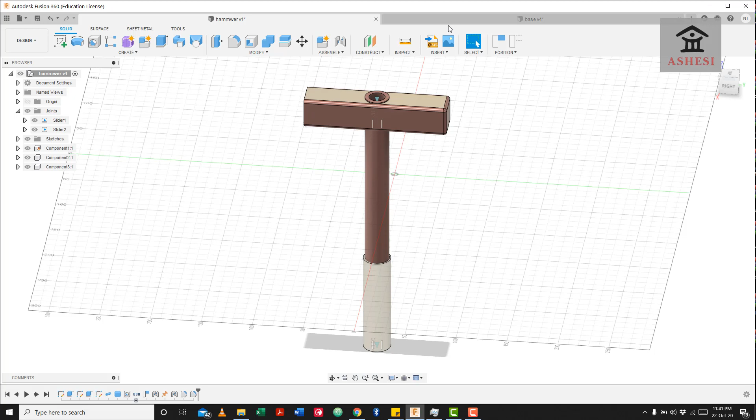In Fusion 360, the tool that helps us assemble the various components is called joints. We'll use joints to assemble this hammer with a sliding plastic handle, to look at the basic types of joints, and then shift to this gearbox, where we will analyze the motion between the various types of gears on this panel.

We will also learn about the various types of motions we can establish between the joints we create, how we can limit the joint motion of some of the gears in this assembly, and how to link the motion of, for example, this spur gear with this spur gear, so that when I rotate one, the other can move as well.

A quick way we can apply this gearbox is in building a windmill. Let's say we want the wind to rotate this big gear through a very short distance, and we want to multiply the distance through which this gear moves by 4. We can have this system of gears that multiplies the distance through which the smaller motor moves by 4, using this arrangement of gears in a ratio of 1:2:4.

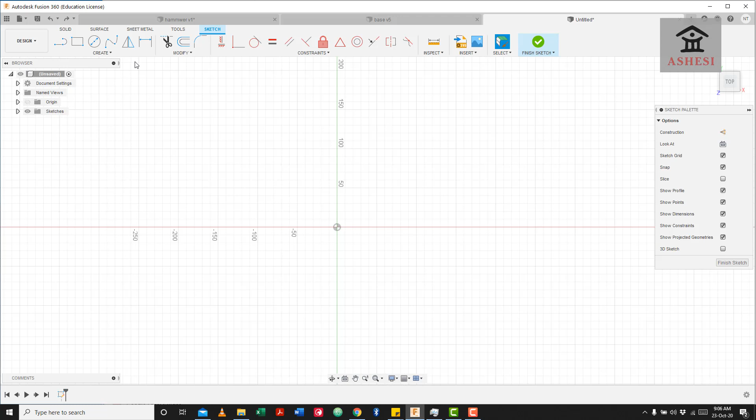To create the hammer, I'll create a new tab and start with a 2-point rectangle of dimensions 120 by 30, then use the dimensioning tools to modify the dimension to 120 by 30 millimeters.

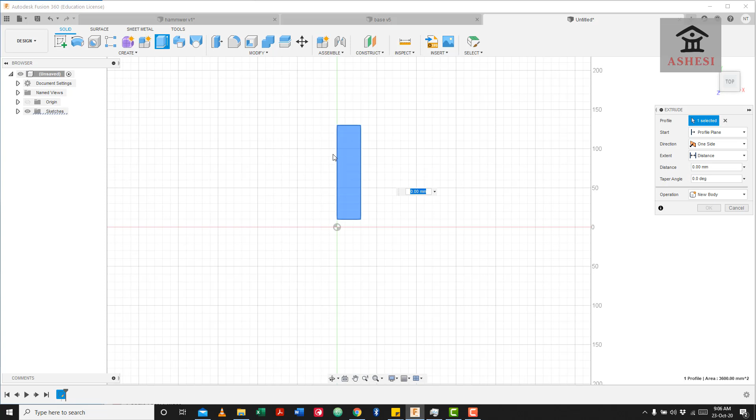I will then extrude this to a height of 30 millimeters, followed by using construction lines to locate the middle of this rectangle by drawing 2 diagonals.

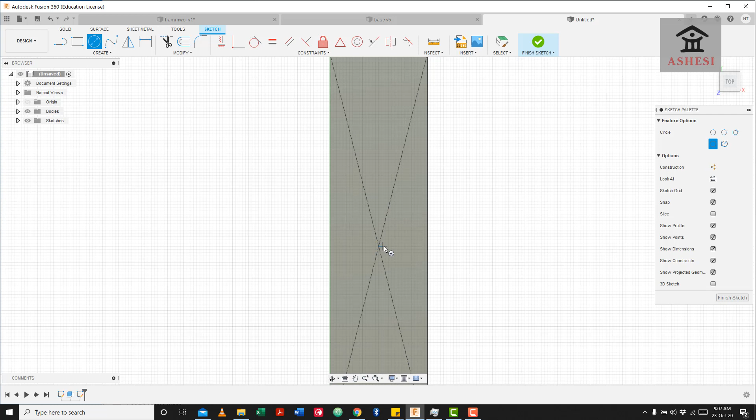I will then draw a center point circle at the middle of the diagonal with a dimension of 24 millimeters.

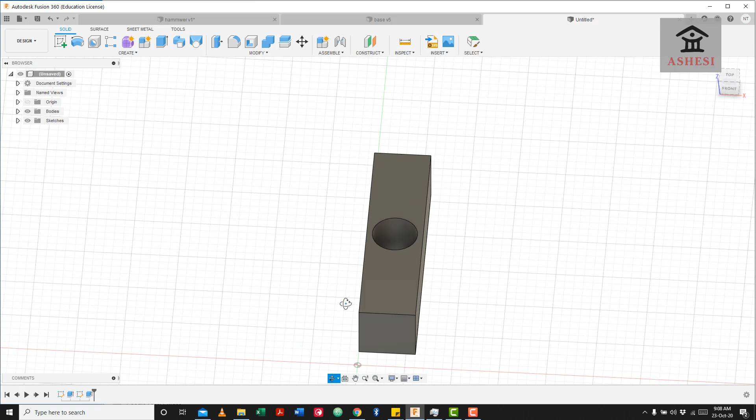I will then extrude cut this rectangular prism by cutting through the circle through a distance of minus 30 millimeters. This will result in something like this.

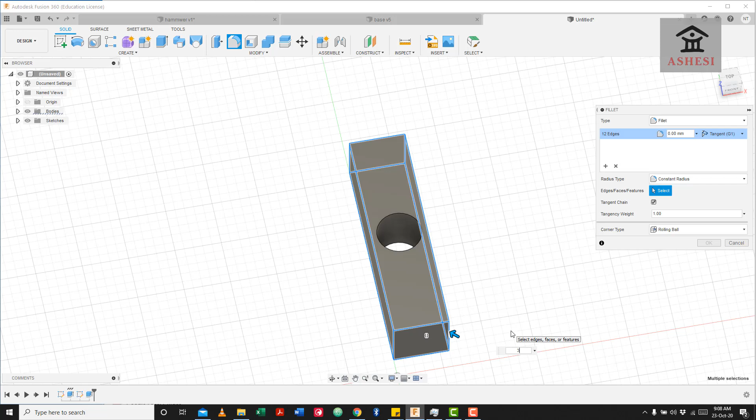I'll now apply fillets on all 12 sides of the rectangular prism by holding the control or command button and selecting all the edges or faces. The thickness of my fillet will be 3 mm.

I will now create the handle of the hammer using the pipe tool. But before I can create the pipe, I need to create a line that the pipe will follow, so I'll create the handle also on the top plane.

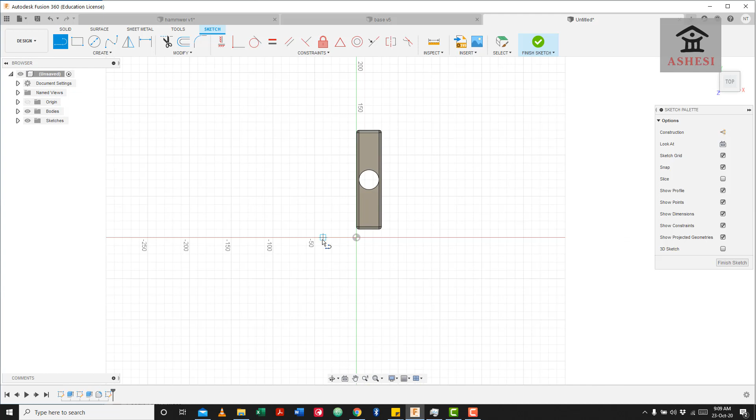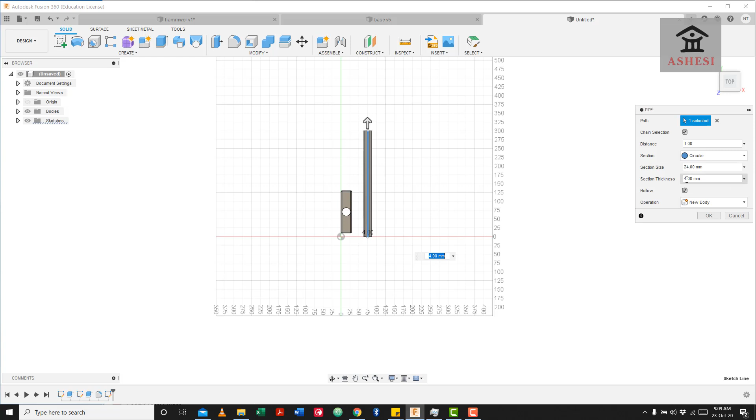I'll begin by drawing a line of height 300 millimeters, then come here to solid, click on create, followed by pipe, and click on the profile I create. I'll make the diameter of the handle 24 mm, the same size as the hole inside this, and make the pipe hollow with a thickness of 4 mm, followed by OK.

So I'll get something looking like this. Now the next thing I'll do is create the plastic handle cover of the handle.

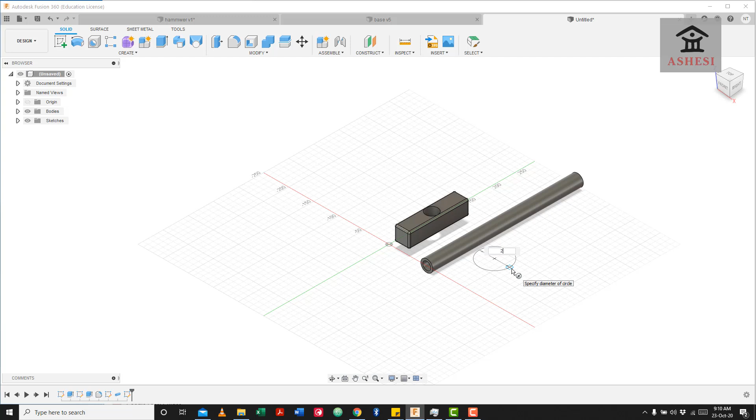To do that, I'll use the cylinder feature, click anywhere on the bottom plane, and draw a cylinder of diameter 27, making the height 100 millimeters. I'll then use the shell tool to shell this to a thickness of 3 mm, and that will be it.

The next thing I will do is change the appearance of the various elements of this hammer. But before I continue, I would like to change the names of the various components to different names so we can identify them going forward.

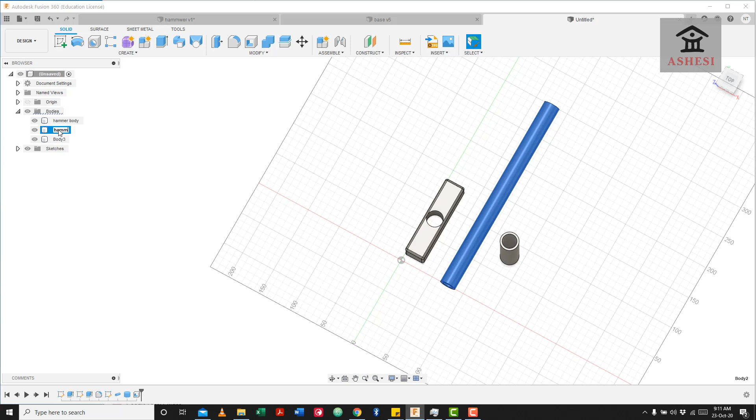So I'll call this the hammer body, I'll call this the hammer handle, and then I'll call the last one the handle cover.

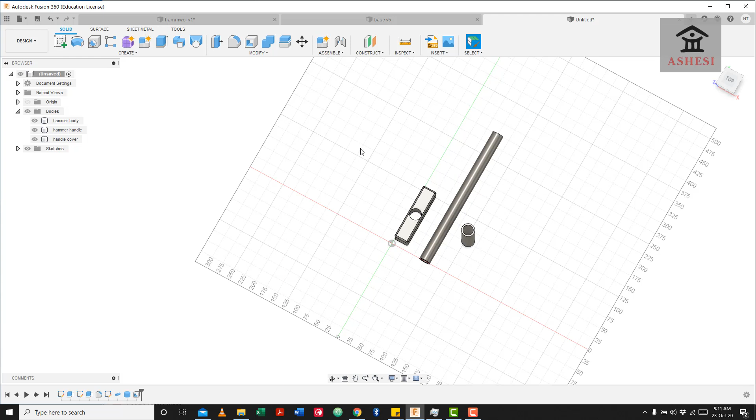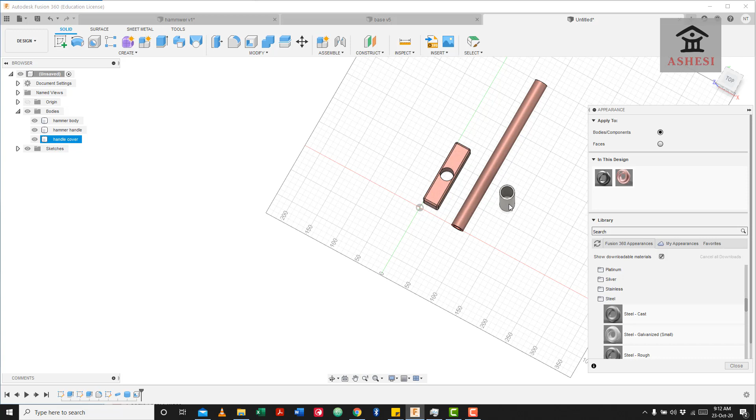Now the next thing I'll do is to change the appearance of the various item bodies I've created here before I assemble them. I'll press on A and change this one to steel cast, then change the color a little to this wine color, and use the same color for the handle as well. I'll now change this plastic handle to ABS white.

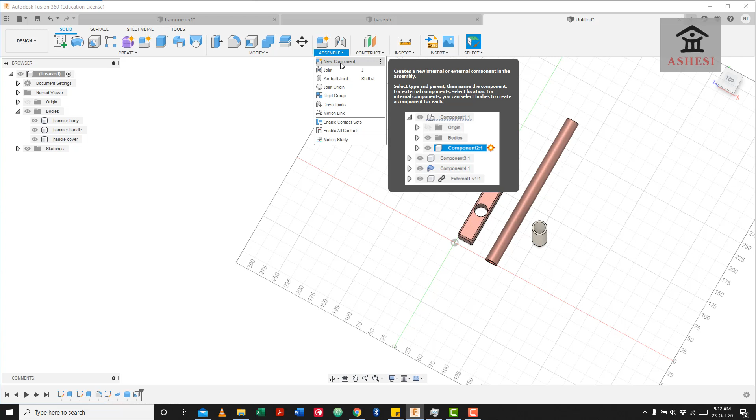The next thing I'll be doing now is to create joints between them. Now, to be able to assemble this into a hammer, let's explore the assemble menu. There are a number of items over here. The first one here is to new component, which you can use to create a new component of your assembly.

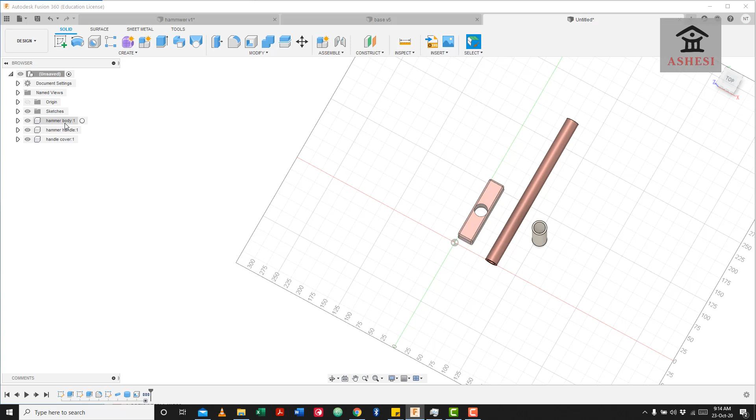Now you notice that in this modeling we have done so far, we are having 3 different bodies. To be able to assemble something in Fusion 360, you need to convert your bodies into components. The main difference between a body and a component is simple: if this body is constrained to the geometry, this plane that we are using over here, then if I want to move it, I'll be moving it with respect to this plane. But if I convert it into a component, Fusion 360 will now treat everything which is part of this as a single unit - treat this handle as a single unit, treat this as a single unit, etc. So I can create multiple copies of all of this, and it has nothing to do with the geometry of this current plane. So we'll convert all of this into components by clicking on bodies, then right-clicking and selecting convert to components, and then you'll be having these 3 new components created for you over here.

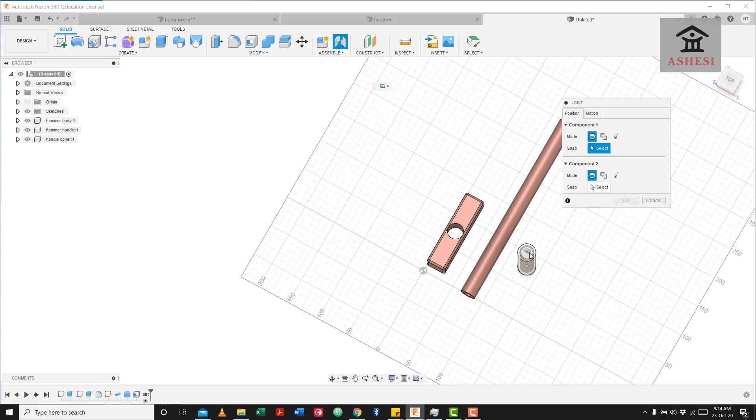Now the next thing we'll do is to create joints between them, so we'll create a joint between the handle and the handle cover. When you want to create a joint, all you are trying to say is you want to select a point on the geometry of the figure where something meets something. The joint marker is this icon that, as you move the cursor, begins to show on the various parts of the bodies or components you are having over here.

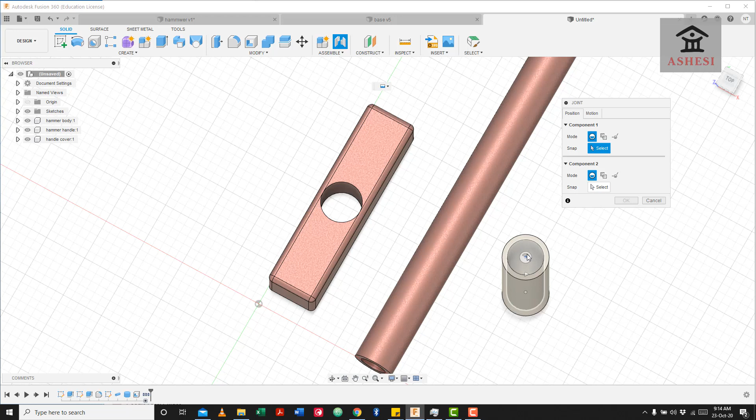So if I put my marker up here and I want my joint to be created down here, all I have to do is click and press Control, keep moving my cursor till I get down here. I can click here, followed by this place, and you see the handle will automatically slide from where it was to the handle. I am okay with it, so I'll click on OK, and then I'm done assembling this one and then this one.

Now the next thing I will do is I would like this hammer to not move, and I don't want the handle to come off this handle. So there are 2 things I'm going to do. The first one is I'll click on Assemble, then click on Rigid Group. When I click on rigid group, all that it means is this handle and this handle cover are one single unit and they move together.

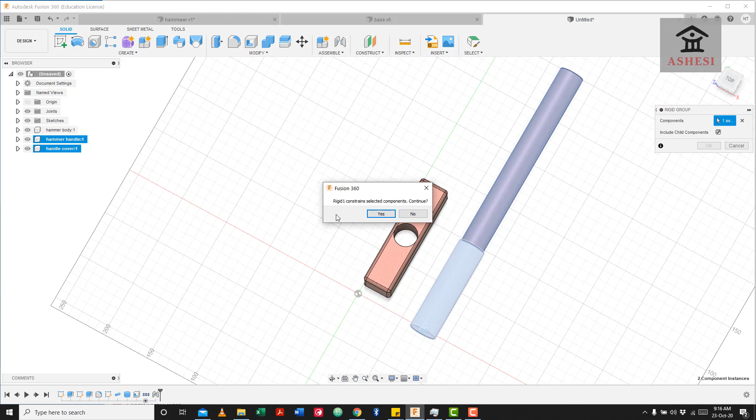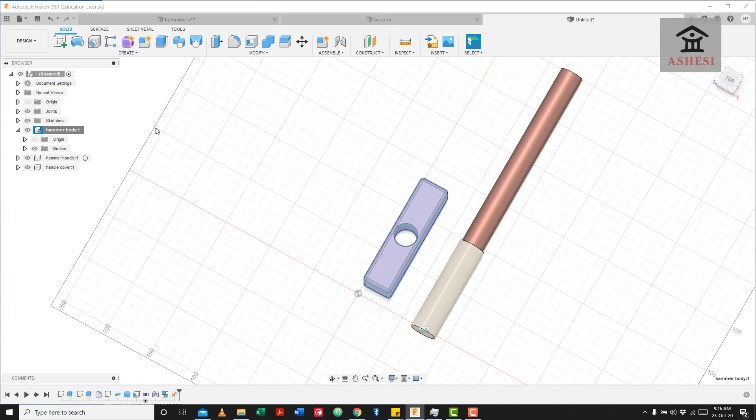So I'll click on this one, click on the plastic side, then it will ask me: do I want to constrain the following components? I'll say yes. Now the next thing I will do is to ground the hammer body, because we want the hammer body to be something stationary for the handle to be assembled onto it. So I'll come here, click on the hammer body, and click on ground. What that simply means is I can no longer move this hammer body around, but I can move this guy around very easily. So I'm now coming to create a joint between this guy and this one.

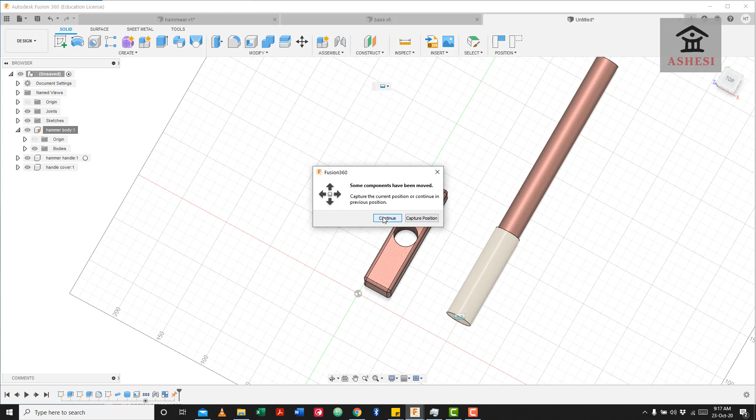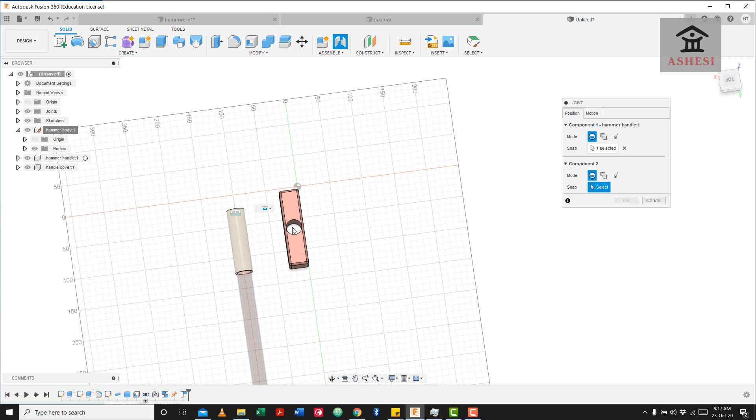So I'll click again on assemble, create joint. Now, when you are assembling, you'll be getting a lot of these prompts. It says some components have been moved - capture this position or continue with previous position. You can either capture the position if you want to, or continue if you don't want to capture it. So I'll capture the position, and then the next thing I'll be doing is to create a joint on top of this hammer, like this, and then I'll follow it up by creating another joint right on top of this.

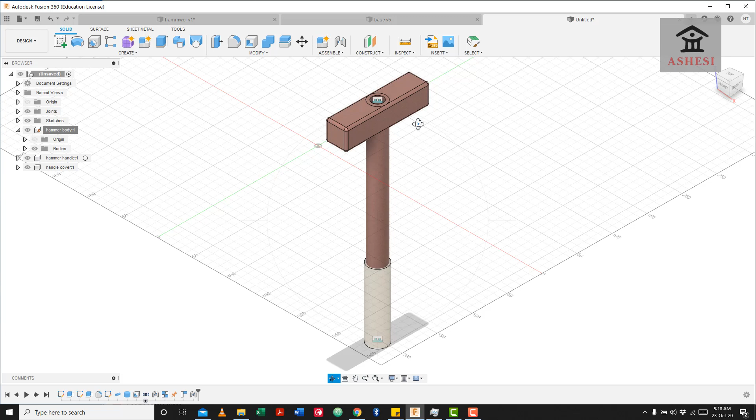You notice that the handle moves to come and snap fit at this point, and then all I have to do is press OK. So this becomes our hammer. Now there are a number of things we can do.

We can edit the joints we've created by clicking on the first joint, which we created between the handle and the handle cover. You can right-click on it and click on Edit Joint, and there are a number of things you can do here.

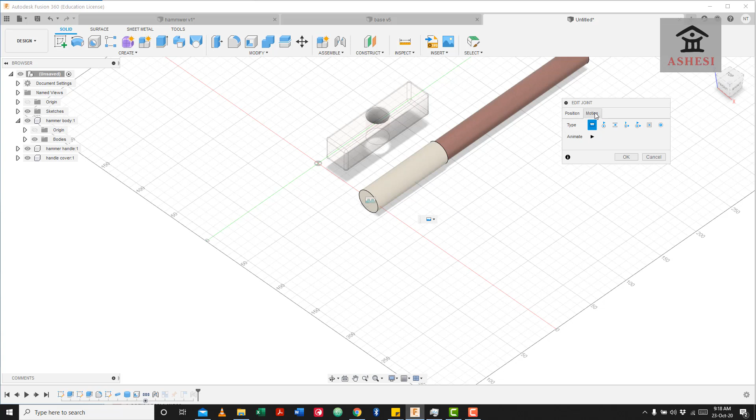Let me go to the joint motion. I can make the handle cover rotate around the handle by clicking on revolute. Or I can make it a sliding assembly where the handle can slide freely. Or I can make it cylindrical, so it rotates on two axes: the axis at the bottom, and the axis along the body of the handle.

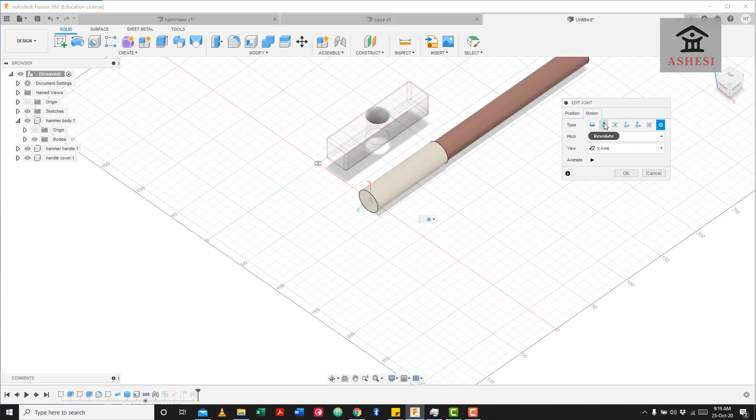Or I can use the pin slot motion, which you can see here, or the planar motion, which you can see here as well. Or I can give it a ball bearing motion using the ball motion joint. I'll leave it at revolute for now, and click OK.

Now, to create the system of gears or the gearbox that I have here, I'll illustrate how you use the type of joint called the as-built joint. When we were creating the hammer, all the various components were lying at different parts of the plane, and we just created joints between them.

With the as-built joint, we need to move all the various components to where we want them to be before we create the joints between them, so that they can interact with one another.

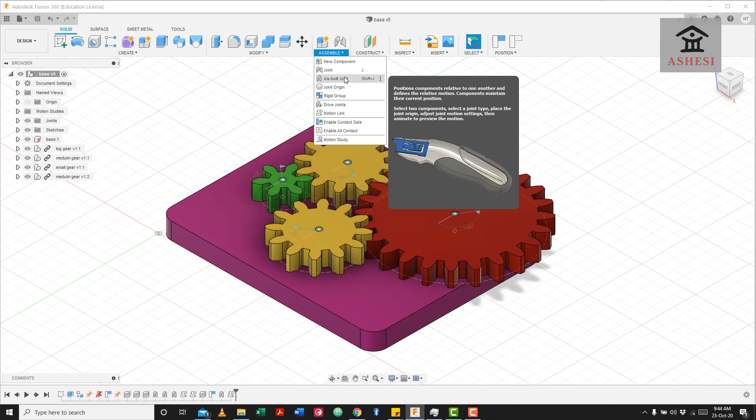So if we want to create this gearbox, we'll first need to create the different sets of gears, followed by the platform on which they lie. After that, we'll move all of them to their various positions so the teeth can intertwine with each other before we create the motion between them.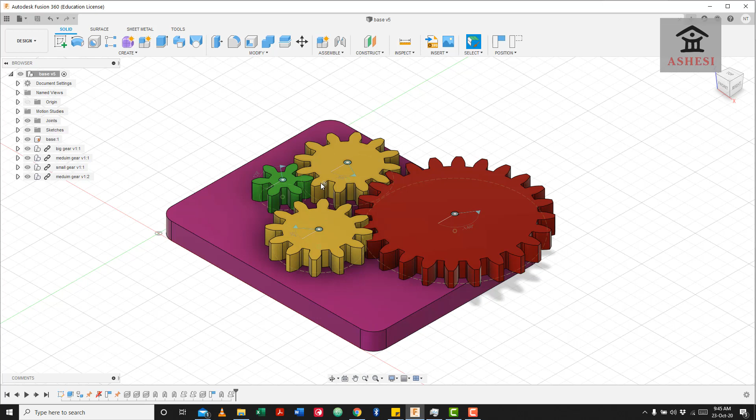So to start, I'll create a new tab and go the old school way by creating all the gears separately, then moving them into the assembly, like we do when using SolidWorks.

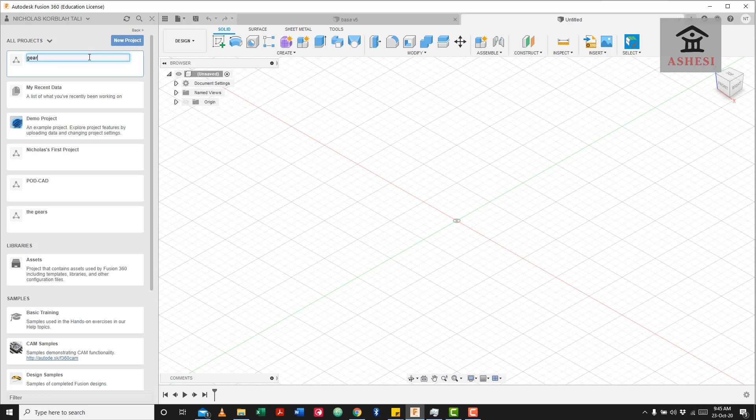What I'll do is simple: click on the data panel, go to my home directory, and create a new project called Gearbox. After that, I'll open the new project I've created and create a new folder in it called Gears.

I'll then open this and create the different gears into it. We'll be using the Spur gear tool that we used last time. All you have to do is click on Tools, then Add-ins, followed by the Spur gear command, and you have a dialog looking like this.

Now we are going to create 3 different gears, and we want these 3 gears to be in a ratio of 1:2:4. So we'll need to modify these settings so the gears can be in that particular ratio.

To determine the gear ratio, I'll only be using the number of teeth to determine the ratio. So I want to create 3 gears with teeth ratio 6:12:24. The first gear will have 24 teeth, the second will have 12 teeth, and the last will have 6 teeth.

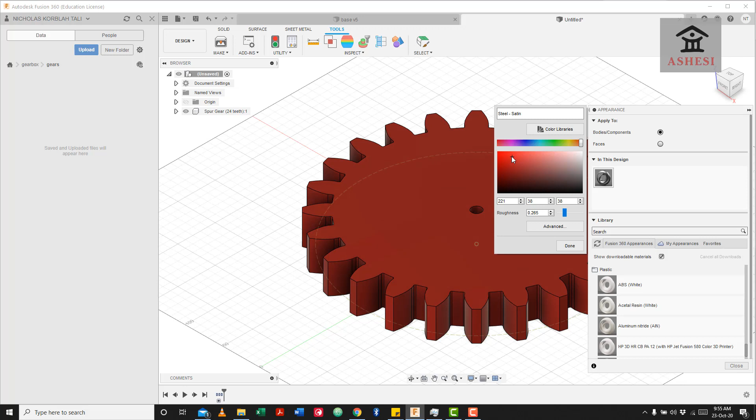So the resulting gear now looks something like this. I'll click on Appearance, change it to Steel, then double click on the steel to give it a beautiful red color like this, followed by Done.

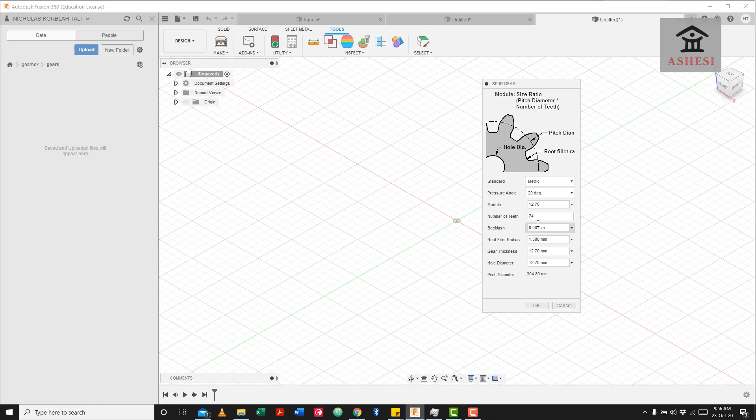The next thing I'll do is create a new tab and create another gear with a number of teeth of 12. I'll click on Tools, then Add-ins, then Scripts, followed by Spur gear, Run. I'll leave every setting as is, change this one to 12, change the gear thickness to 40 mm, and press OK.

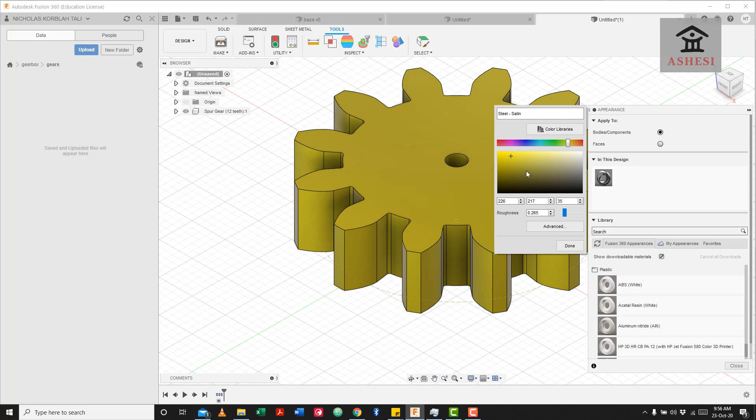I'll then click on Appearance, use the same material, double click on it, change the color to something looking yellow like this, followed by Close.

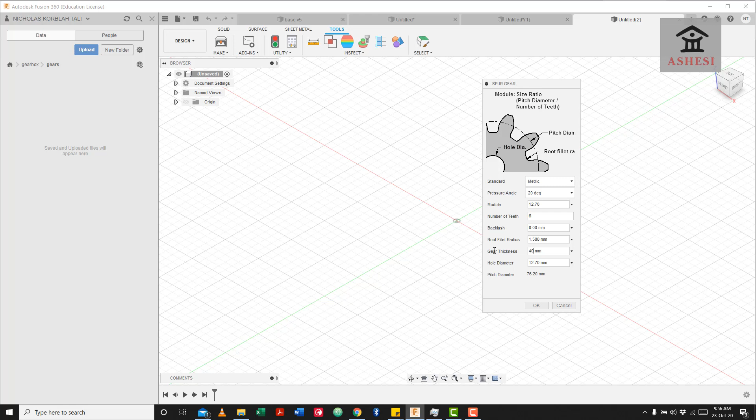Next, I'll create a new tab and repeat the same process with the gear having 6 teeth. I'll click run, maintain the same settings, change the number of teeth to 6, and change the gear thickness to 40 mm, followed by appearance with the same material, then double click here to make this green.

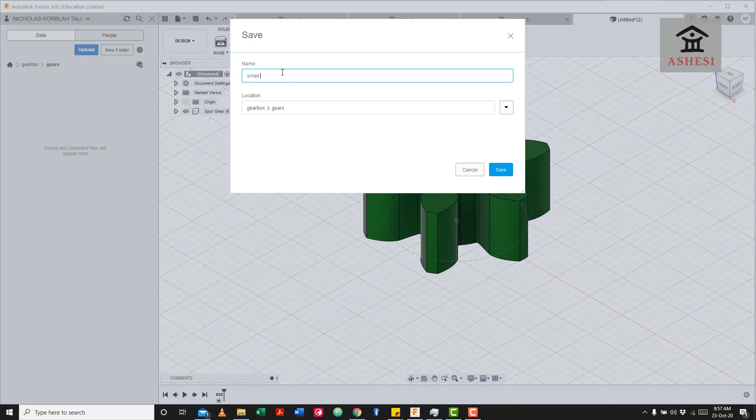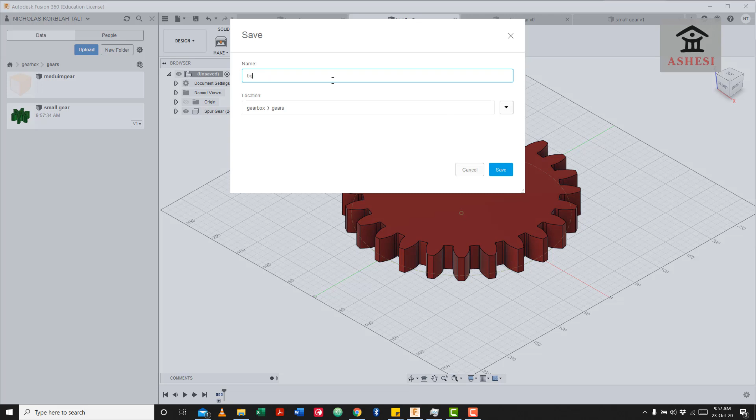Followed by done, I'll save this one and call it small gear, followed by save. Then I'll come here as well, save this one, call it medium gear, then save. I'll come here, press save once more, and call this one big gear, followed by save.

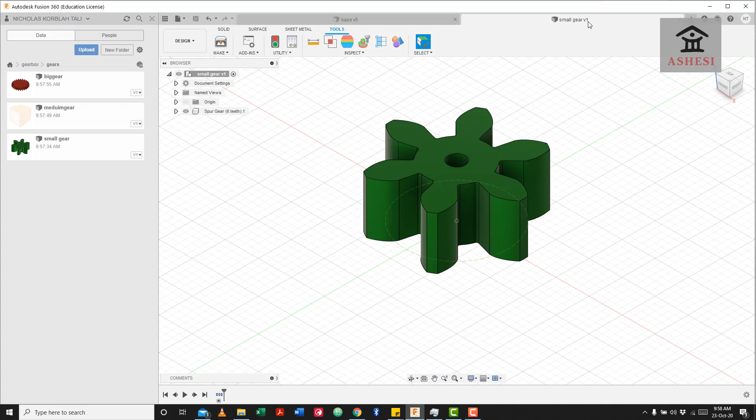Now you can wait for it to synchronize into the cloud, and then you can close the various tabs because we will no longer modify the gears.

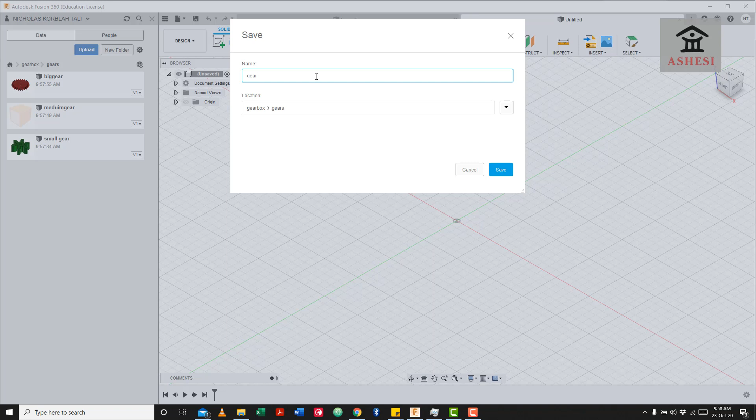Next, I'll create a new tab and create the platform on which the 3 gears or 4 gears will be sitting, then move the gears in as different components. I'll click save and call this one the gear base, followed by save, then click on sketch.

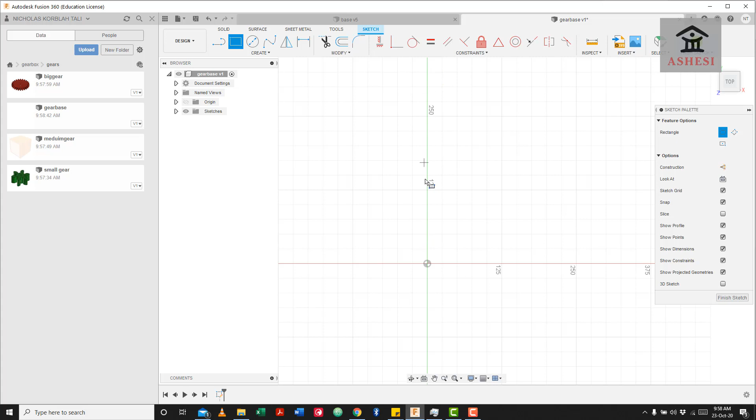I'll select the bottom plane and draw a 2-point rectangle of dimensions 400 by 500. I'll use the dimension tool to change this to 400, followed by this side to 500 millimeters.

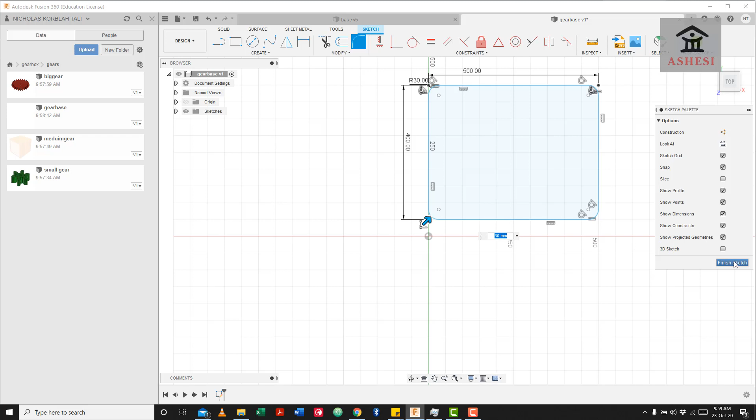I'll now apply fillets of radius 30 mm on all 4 sides of my rectangle to make it look something beautiful like this. Then I'll press extrude, and extrude this to a height of 40 mm on the Z axis. So the result looks something like this.

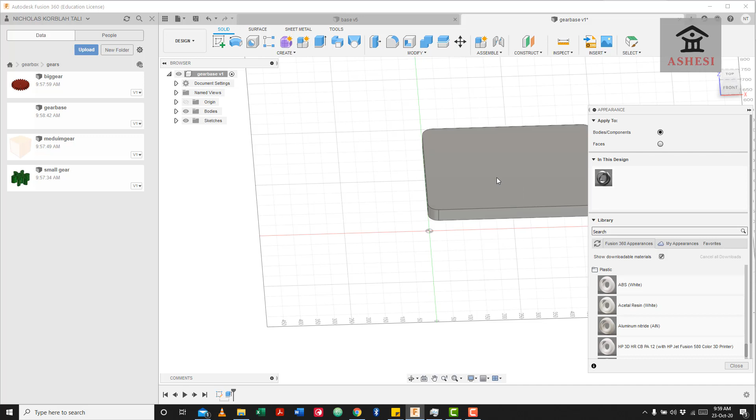Next, I'll press A for appearance, use the same material, move it here, double click on it, and give it a slight color, I don't know if this is purple, well let's call it purple, then press OK and click close.

Now the next thing I'll do is convert this platform into a component. It is still a body, restrained to this geometry. So I'll change the name from body 1 to base, then right click on it and press create component from body. You can see that the base now becomes a component and is no longer a body.

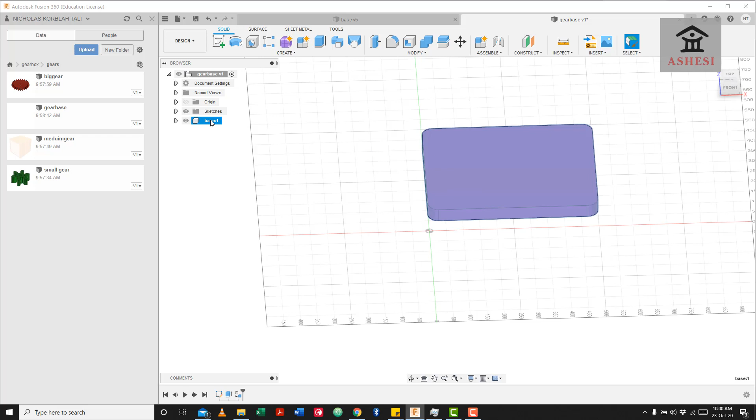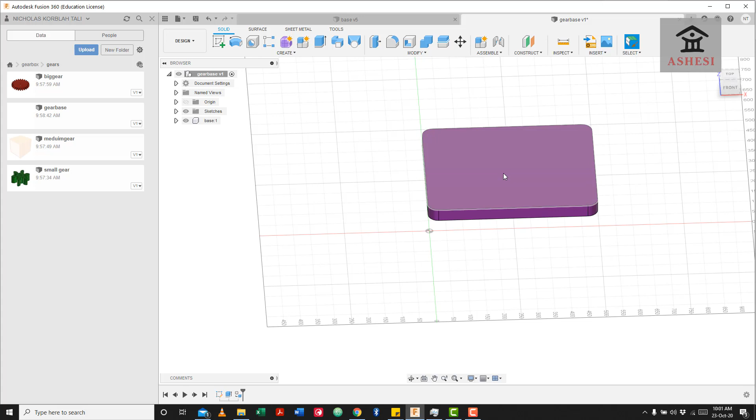The next thing I have to do is move the 3 different gears I created onto this platform. But because this platform is raised 40 mm above the origin of the Z axis, we'll need to offset that when moving them onto this platform. So with the as-built joint we're going to create between these 3 gears, we'll move them onto the position on the base, position them exactly how we want, and have them interact with each other before creating the joint between them.

Let's start with the big gear. I'll just grab it and move it somewhere here, then look out for the prompt that will come. Now, when you want to move or copy any model onto another, there are a number of motions you can have between them.

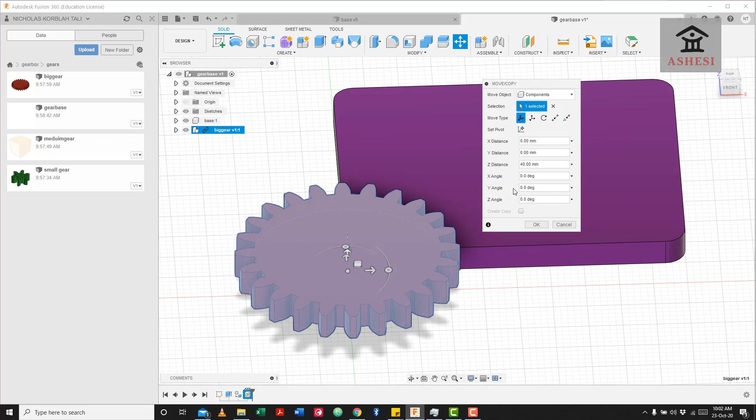The first one is the translation motion, which is like moving along a line. The second is the rotation motion, then the next is point to point, and then point to position. So the first task I want to accomplish is to raise this first component above the base, that will be an offset of 40 mm on the Z axis. Then I'd like it to come and position itself somewhere around here.

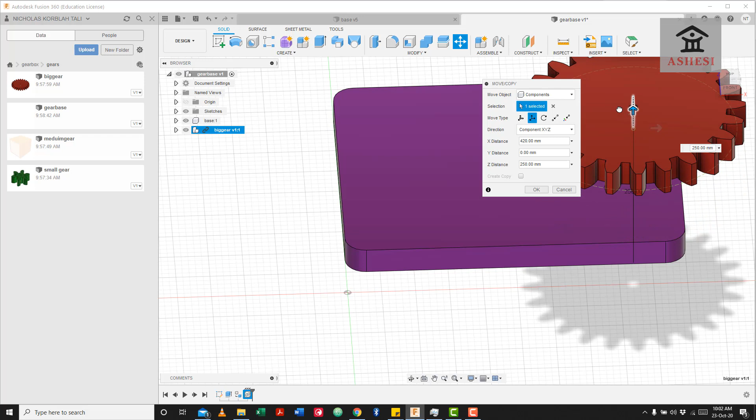So I'll click on the translation motion because I know it's on the face of this component. I'll use the various arrows here, this one and this one, to move it to the position I want it to be, and use this one to move it here like this. If I'm satisfied with it... actually, I think I made a mistake, I moved it on the Z axis instead of the Y axis.

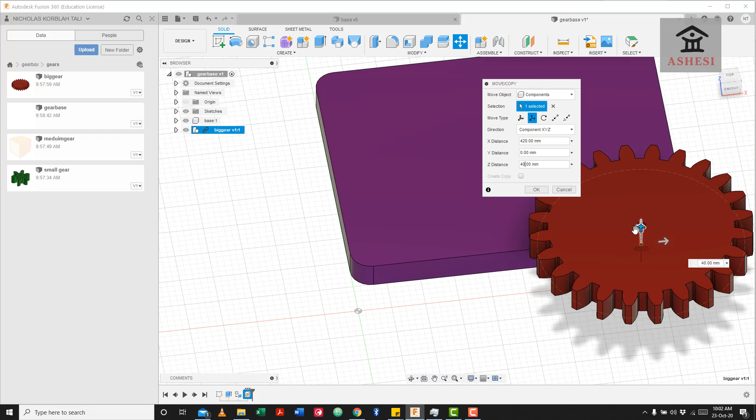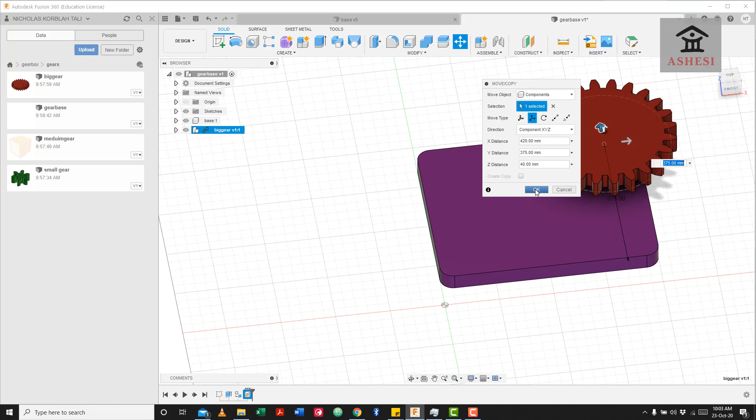So I'll change the Z axis here back to 40, and then I will carefully click on the Y axis and move it to the position that I want it to be in on this base. So you can see that the Z axis is still 40, the Y now is 375, the X is now 420, which is good. And then I press enter.

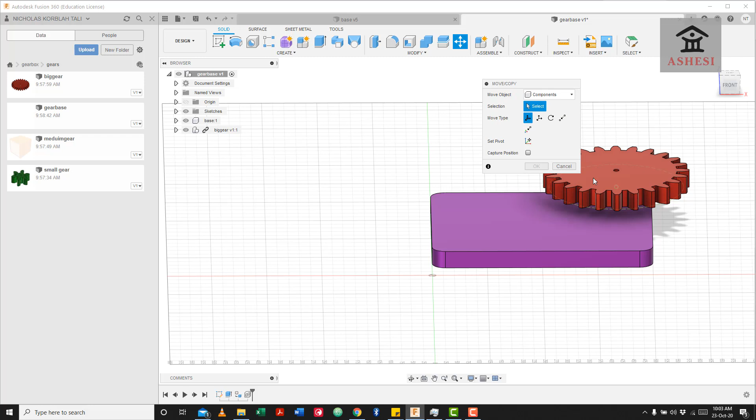So the result of this movement is something like this. You can still see that something is hanging somewhere at the moment. I think this thing is above this base by roughly 40 mm. So I can once again click on the move or copy tool, click on this body, and then component, click on this component, and then I'll move it through a distance of minus 40 to see if it will sit exactly on my base. So, like this.

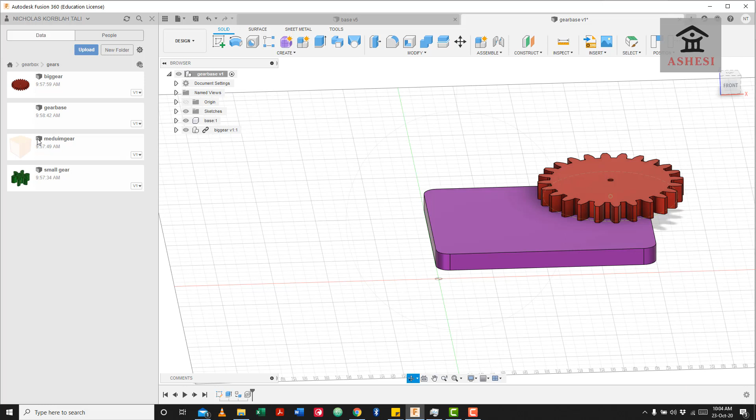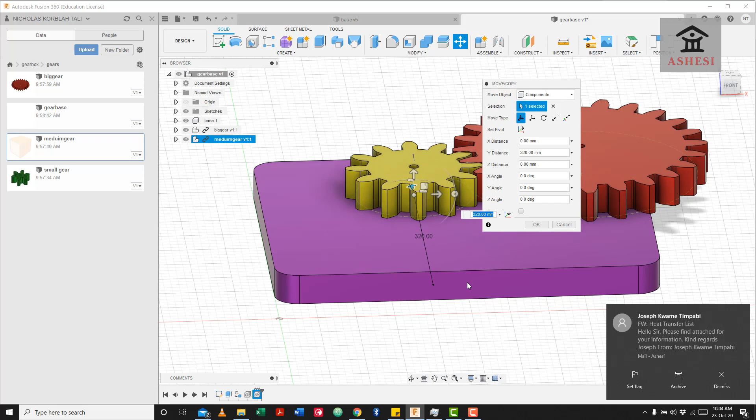Now the next thing I'll do is to move the second gear onto the platform. So I'll click here, drag it, and bring it somewhere here, like this, and then I'll wait for it to appear. So I can move it to a height of 40 mm like I did for the previous ones. Move it somewhere here like this. Click on this axis as well. Move it here. And then my next goal is to see if I can make the gear sit comfortably and interact with this one. So I'll still use the move.

All right, so I think I have to move in smaller steps. So I'll make this one 315 and see what will happen. Good, I think I should make it 316. Good. And then you can clearly see that I have a perfect interconnection between this gear and this gear. And all I have to do is press OK.

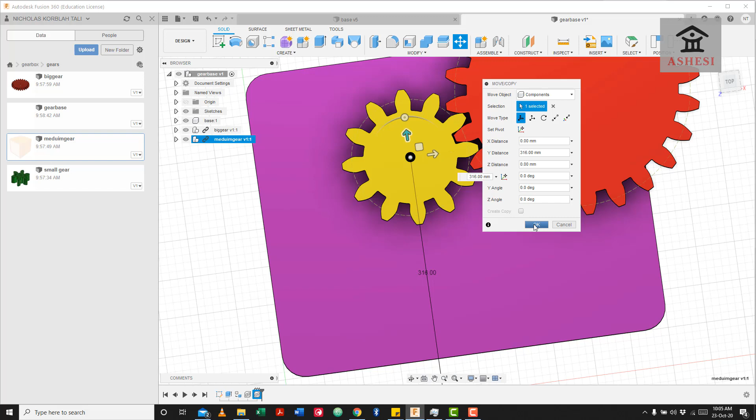So once again, with the as-built joint, you have to position the components at the position that you want them to be in before you are able to do your assembly.

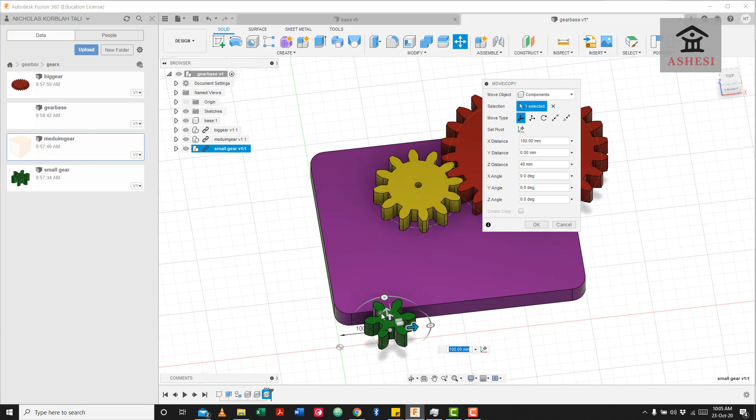The last thing I'll do is move in the small gear here and move it like I did earlier. So I'll move it 40 millimeters on the Z axis, and then move it here this way, and then I'll now go on the Y axis, and try and see how best I can connect this gear and this one together. So I'll move it here a little bit.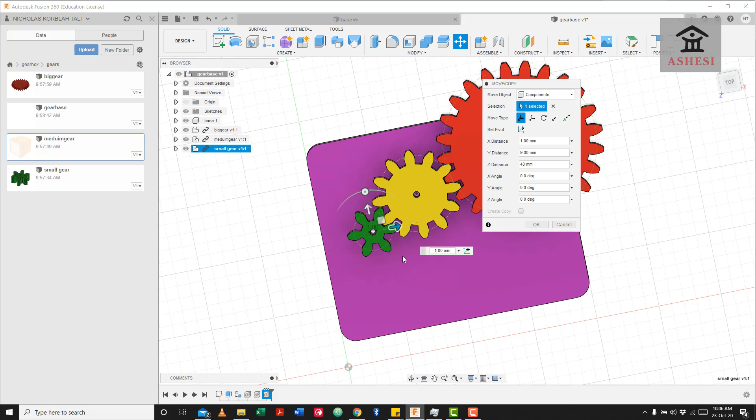So I'll move it here a little bit. Let's see, 5 mm, 6 mm, 7 mm, 8 mm, 9. All right, so 9 is kind of looking good. And then I'll bring it a little closer. Let's see, 1 mm. And I think I got a good interconnection now between this gear and this gear. And then I'll press OK to confirm.

All right, so I have all my 3 gears arranged in position. The next thing I'll do is create the joints between them first, followed by the motion between them.

Now, before I can create the joints and motion between this system of gears, I'll need to determine what is stationary and what is moving. The base is stationary, and the 3 gears are moving. So I'll click on the base, right-click, and ground it so that the base becomes stationary and the gears are mobile. After that, I'll create the as-built joint between the gears and the base, followed by the motion definitions between them. So I'll click on Assemble, followed by as-built joint.

I'll capture the position, and the components in my joint are this guy and this guy. And then I have defined the type of joint to be the revolute type of joint. So I'll need to specify the point where it is going to be revolving. So when you do that successfully, you see that the gear begins to animate itself. You can animate it over here, change the axis of rotation over here as well. And then if you are satisfied, you press OK.

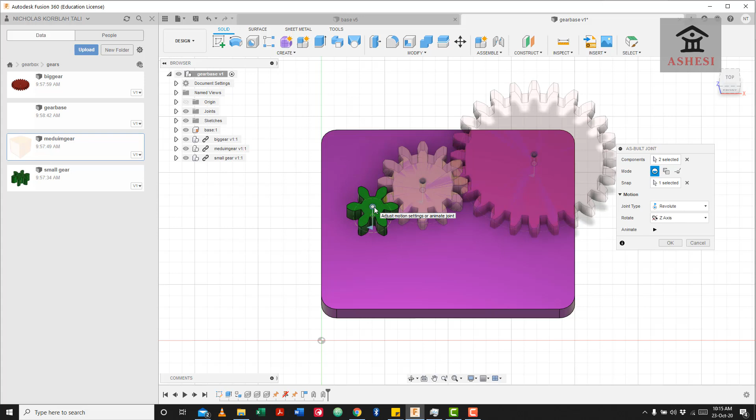And then the last one I'll do is click on Assemble, as-built joint, click on this guy, click on my base, and I'll let it snap to this point, and you begin to see the smaller gear also begins to rotate, and that is it. Now, my goal is to make these gears work with one another.

They should be able to interact with one another. So I am now coming to link the motion between the three gears I have created. I'll come here to Assemble, then Motion Link, and capture their positions. Then I need to select the joints that I want to link their motion. So I'll link this one and this one's motion first, followed by this one and this one's motion. Now you can clearly see that this one is moving counterclockwise to this one.

So I need to change the direction. I'll change this one to minus, and then you see that they are now beginning to interact with each other. So I'll leave this at -1, which means that if this gear rotates through 360 degrees, this one now moves through 360 degrees. But that's not what I want, so I'll change this one to 2, so that when this one rotates once, this guy will rotate twice. So this is a perfect interaction between the two gears I have created, and then I'll press OK.

My next job is to link the motion between the yellow gear and the green gear. I'll click on motion link, select this joint and that joint, and the same thing that happened repeated itself again. So I'll change this one to -1, and then I'll change this one to +2, and see what will happen. So you notice that all three gears are now interacting with each other in a very beautiful way.

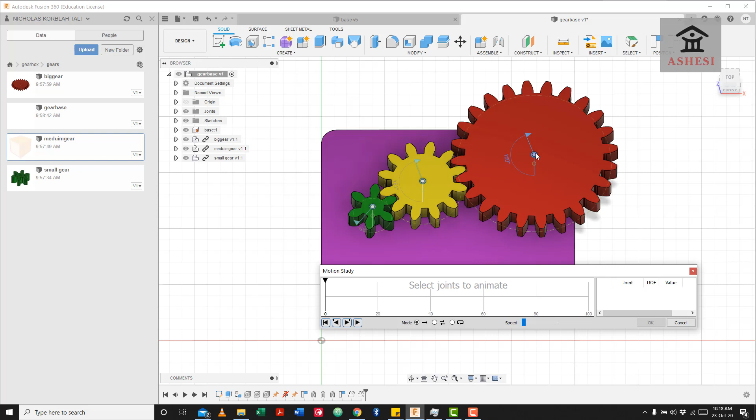So I'll click on Assemble, and then click on Motion Study. When I click on Motion Study, all I have to do is select a joint, and then I can learn more about the motion between this joint and that joint. So I'll need to select this joint for my motion study, and then I'll click on play and see what happens.

All right, so nothing happens. So I can come here and change this one to 360 degrees. That simply means I want this gear to rotate through 360 degrees for me to see what will happen. Now the steps here are the number of times that this gear will now rotate.

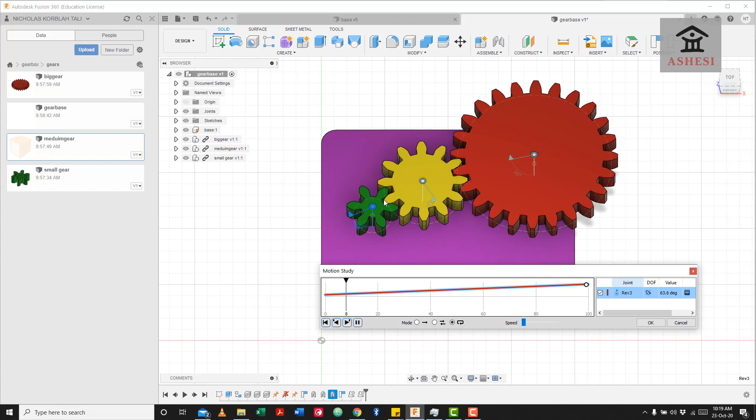All right, so let me click on the play button and see the motion that will happen. The motion study can help you study the various links between the components you have used for your assembly. So I'll make it a loop, and press play once more, and you begin to see that my motion begins to repeat itself, and I can clearly see that if this gear rotates once, this gear will rotate 4 times.

So I'll press OK, and then I can save it. I can change the joints and the motions when I am done. I can come here, right click on this, edit the motion, and change it to something I like. And then I can also come to the joints, look at the 5 different joints I have created, and modify all of them according to how I like.

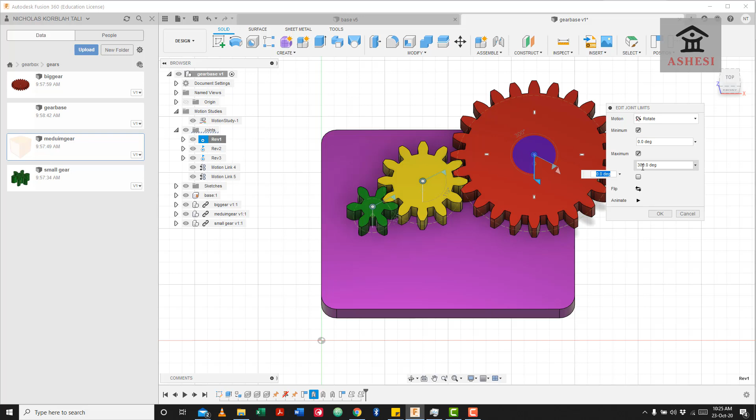Now, to finish this lesson, I would like to show you how you can limit the joints. So you can right click, for example, on this joint, which is the first joint here, Rev 1, and we want to limit it to from 0 to 300 degrees. You change it from 0 degrees to, for example, 300 degrees, so that it can only rotate from here and then stop here, and then press enter. So if you right click on it and then grab it, you can only move it through 300 degrees, and then it will stop at the limits you have set.